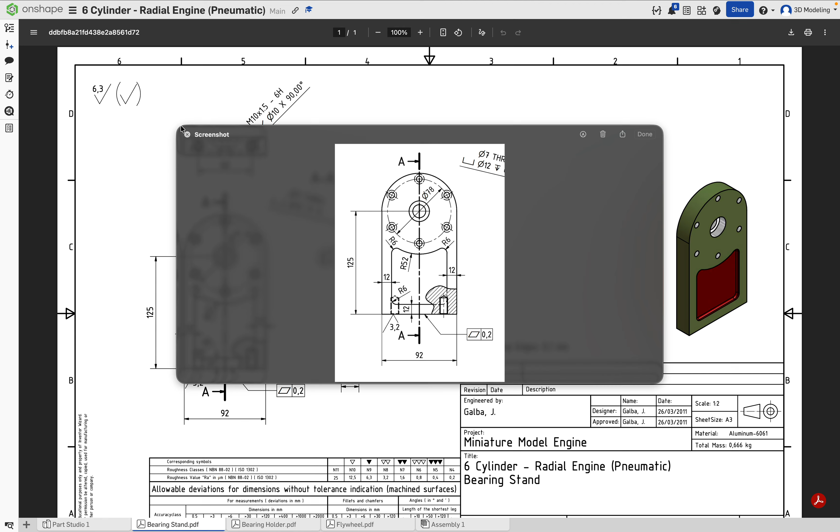Here we go. Now we're moving to our part studio and we will move this back here so it doesn't interfere with us. Now we will draw it in a front plane, so click sketch, front, and let's start tracing it out. So we can see that we will have a big circle. Somewhere from here to here.

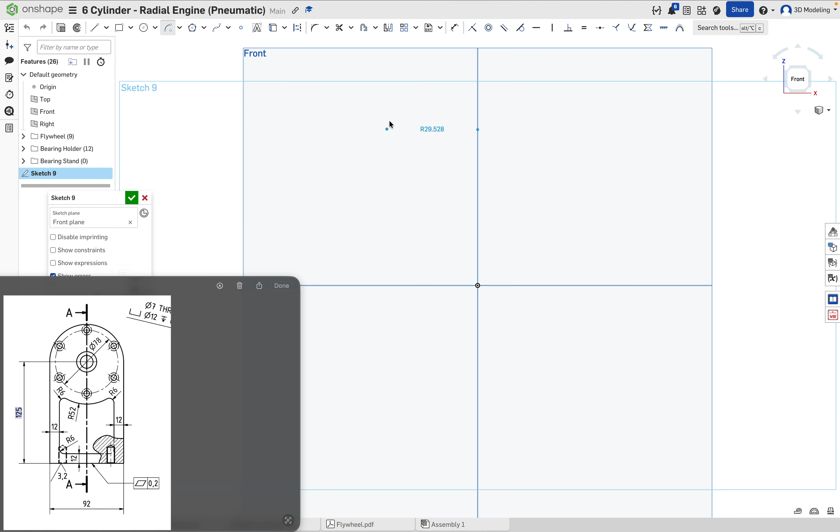And the circle will have a connection between the baseline and the part that will directly connect to it. Now these parts are vertical and this line down here is symmetric around the y-axis. Good. These two parts are tangent, so let's use the tangent tool to make sure that it's true. Good.

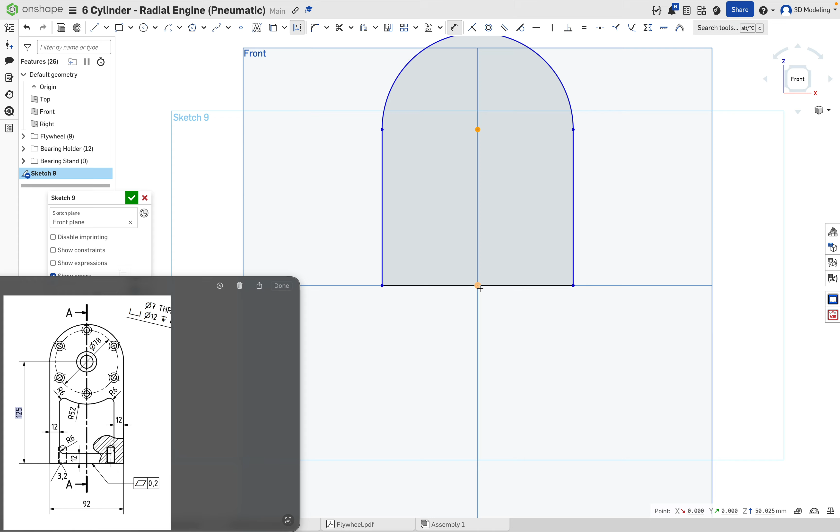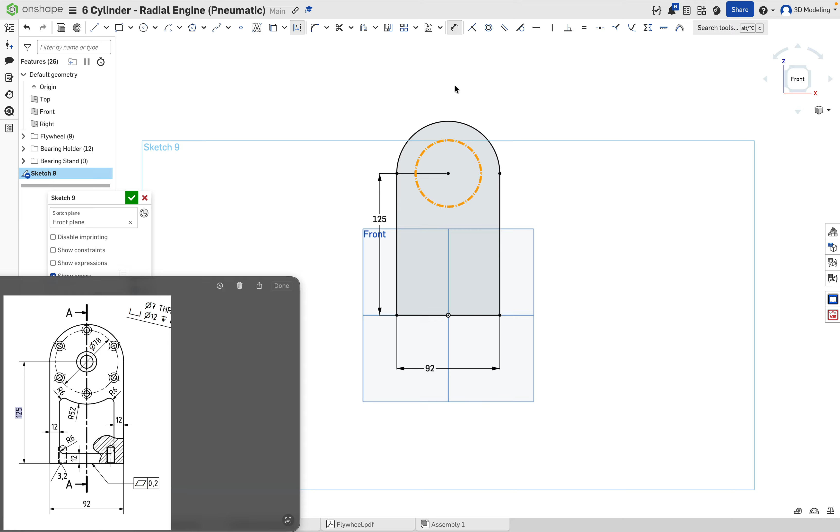And we have the distance of 125 millimeters. So let's go ahead and make sure that the distance from the center of the circle to the origin is 125. Now, let's continue. We know that base is 92. And we know that this circle, right, we also have the inner one. So let's pick the circle tool as a construction and make sure that this one is 78 millimeters.

On the edges of this circle, we have tiny holes that we will deal with later. Before that, let's draw this inner part. And to do that, we will use this tool as well for drawing this part with the radius of 52. As well as this part. Now let's make sure that this line is moved back here and these points are the same, as well as these 2 points are also the same.

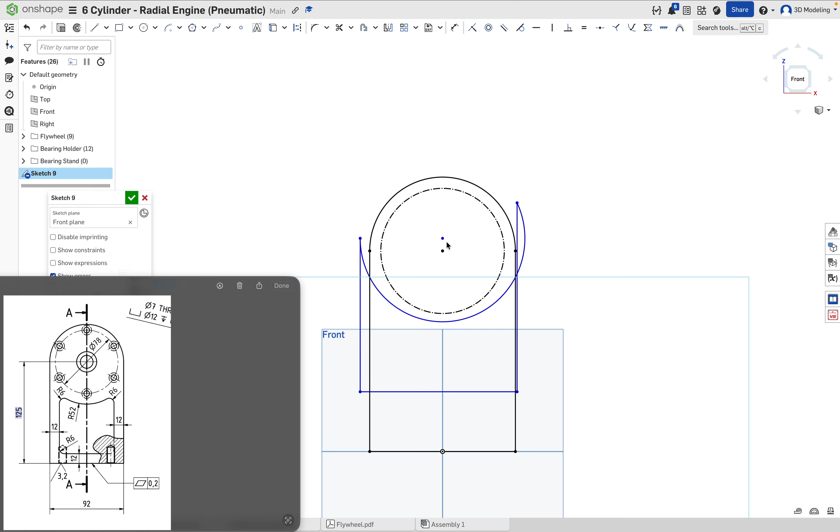Yeah, the sketch is becoming a bit broken, therefore we will delete it for now. And make sure that those dimensions are right. So first of all, the distance between those two lines is 12. And the distance between those two lines is also 12. As well as between those two lines. Good.

Now we can bring those two lines down here. And we can make a circle part that will be 52 in radius. And this will set the dimensions for everything else. Great. Now we will use this tool to round up those angles by setting it up to 6, as we can see right here on the sketch, and we will do it for all of them.

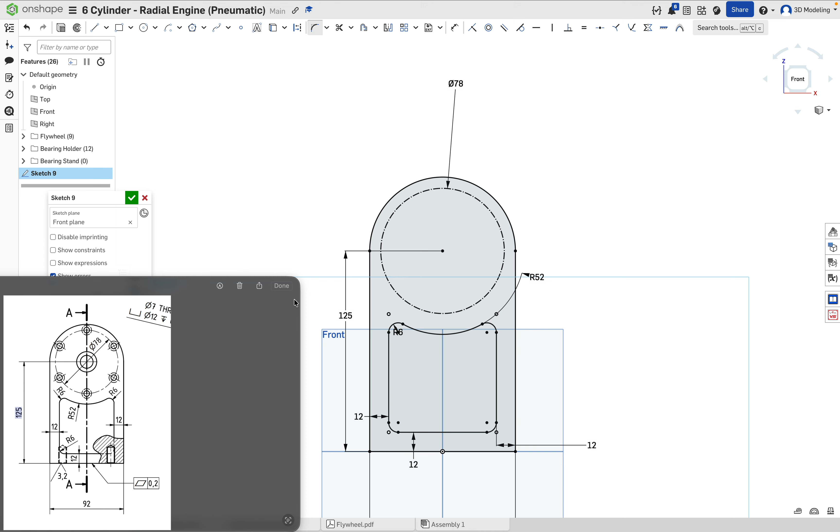Awesome. Now let's move back to those circles. We had done this main part, so we can click OK, and we can go here and look at those circles' dimensions. And we can see that we have one here with 16 and another here with inner 7. So 16 and inner 7. Let's go back here and draw one that is 16. And the other one is inner 7.

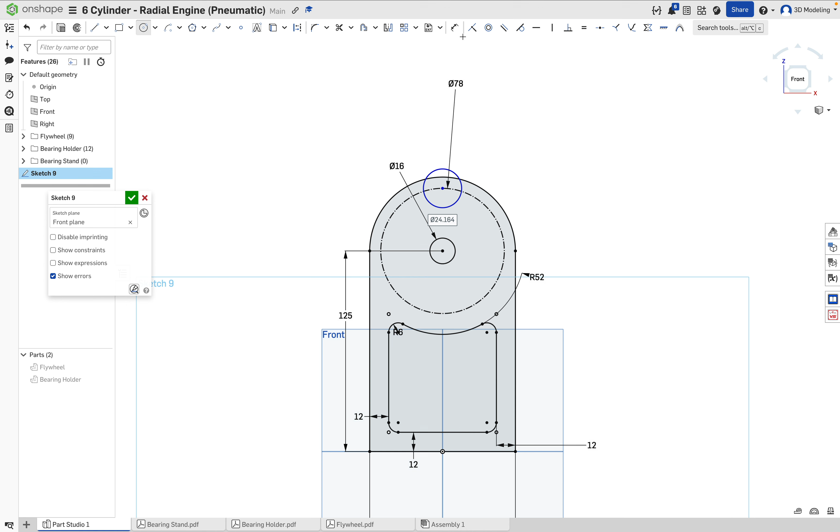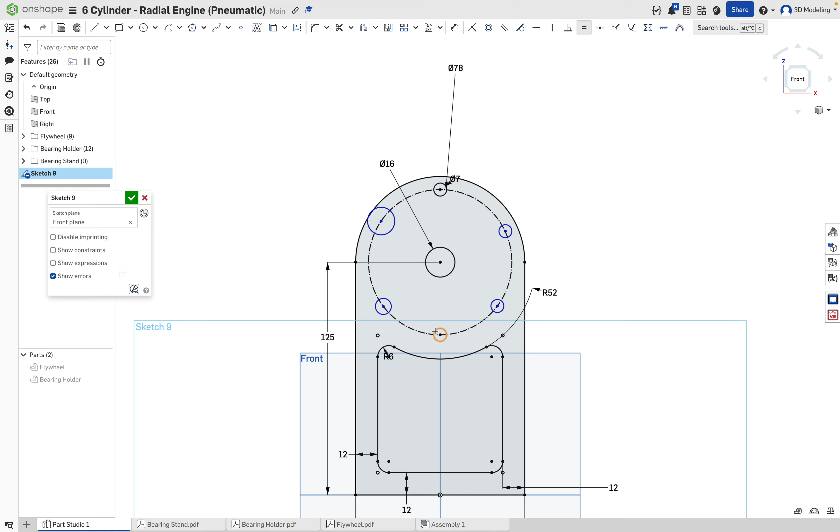Great. Now let's make sure that this point is on this line, which it is, and this point is centered. Now we need to replicate those circles that equal 7. So we'll have another one here, here, here, here, and here, as we previously saw on the image. Now we will make them equal to one another. Awesome. And right now we will use the support lines, because the angles between them should be 45 degrees.

Just let's double check with a sketch. And they are actually not. Go back here. Because this one must be a 90. But it's also weird because they seem equal distance. So what we have here is that those angles must be equal. Therefore, when we look here, they're a bit offset. And because we have here 180, and we divide 180 by 3 segments, it's 60. So the angles between those should be 60 degrees.

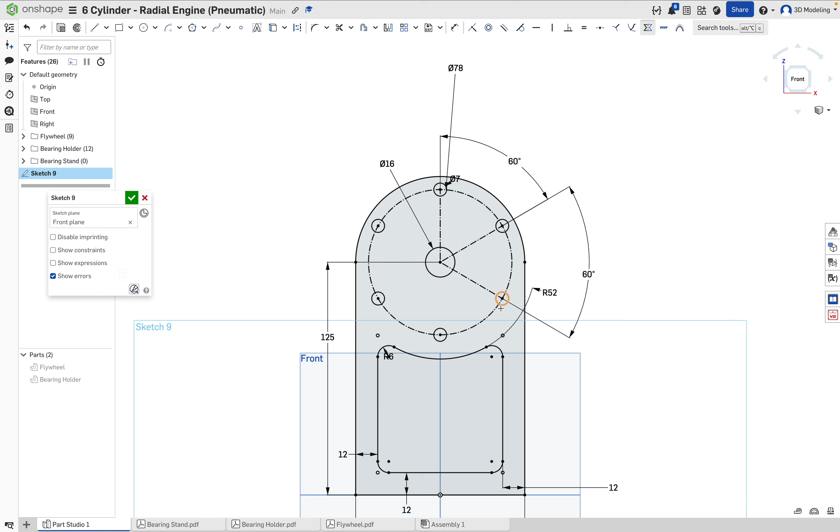And now we will use the symmetric tool to make sure that both sides are mirrored. Great. Now we can click OK, and we can extrude it by 20 millimeters. And how do I know it's 20? It's because when I go back here, I know that thickness is 20. Now we need to do the second hole here. We need to do one that is 25 on the one side and a 6 and a 12 on the other.

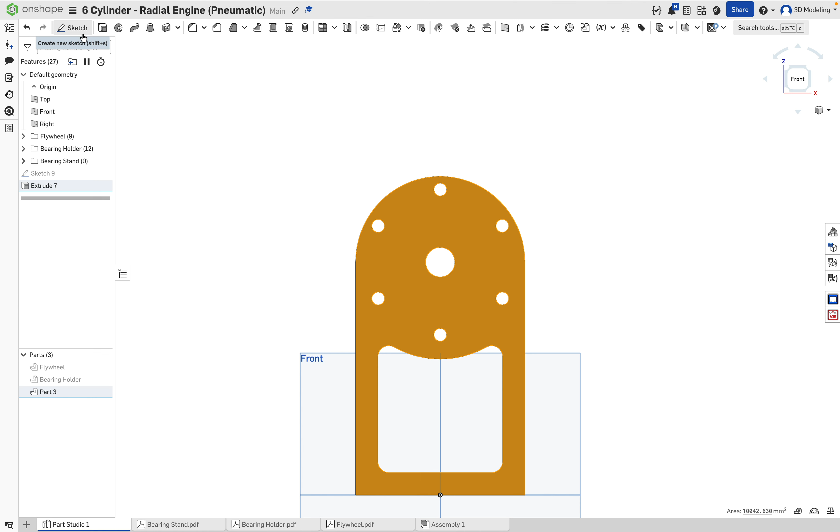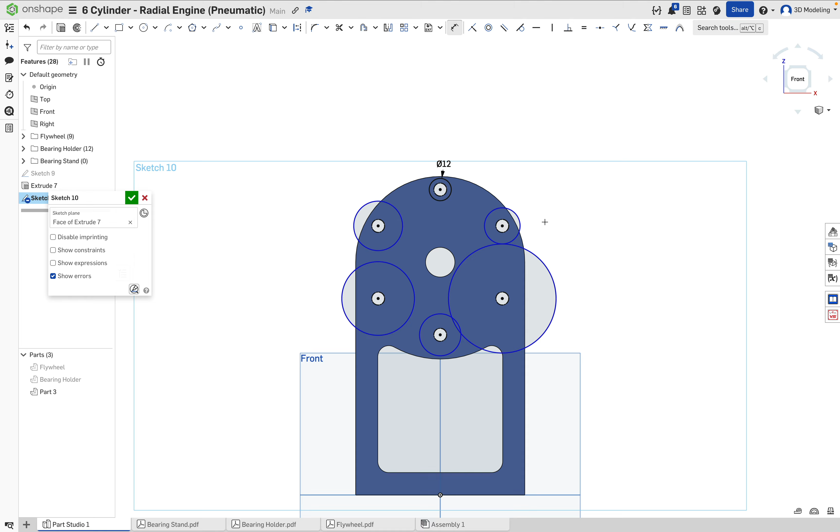So let's go back and let's start with the 12. It will be this side. We'll create a sketch and we will bring outside geometry as the support lines, and inside of them we will make circles that no longer will be support line circles. So let's repeat them. Make sure that this one is 12 and all of them are equal to the single one. We click OK. We go ahead and we extrude and we remove it.

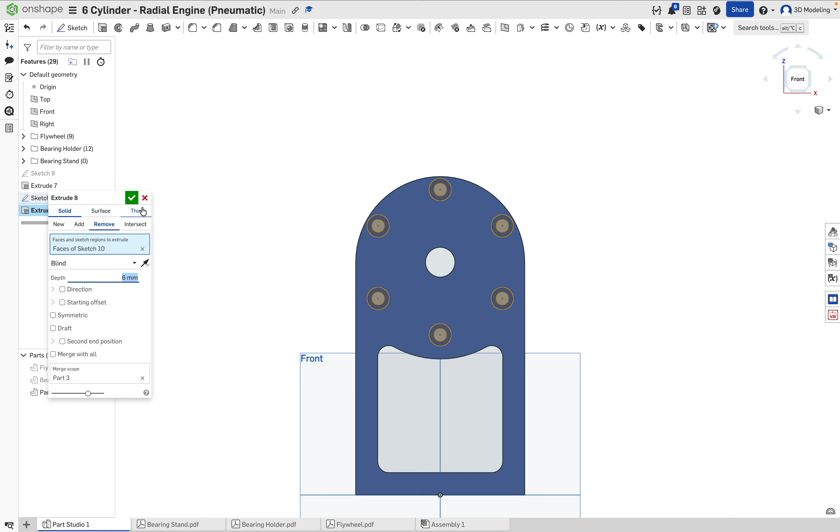But to know how much we should remove, we should look here to try to determine by how much we are removing it. And we can see that this goes in by 6 millimeters. So let's go back and change this one to 6 millimeters. Awesome. Now on the other side, we should also create a sketch. We will bring outside geometry with the circle.

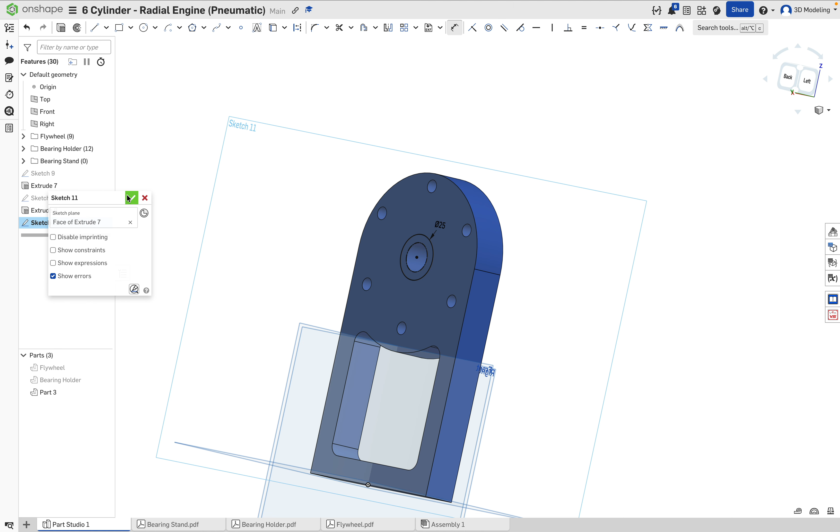We will draw a new circle. We will undo this construction line geometry that's carried over. Go here, we double check that it's 25 and we will remove it by 10. So 25, remove by 10. Go back, set it to 25, click OK and remove it by 10. Remove.

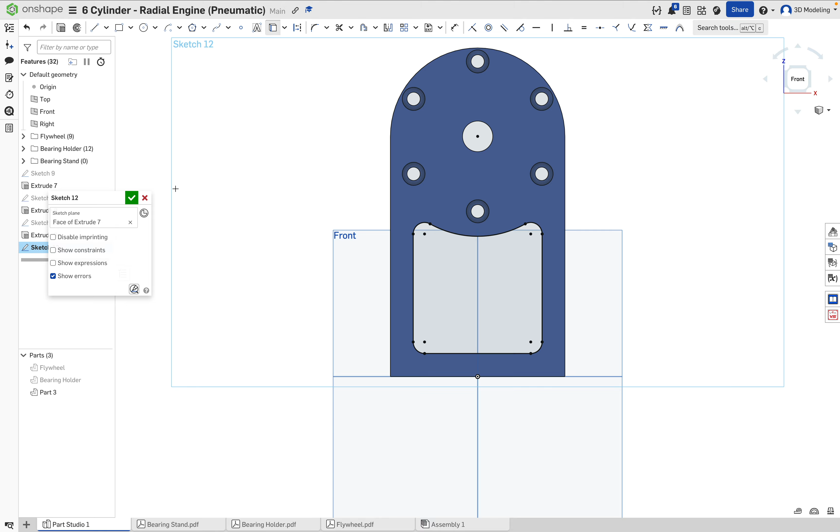Great. Now, you might have noticed that we have this part here that is not exactly how it looked on the sketch. So let's create a sketch and use this outside geometry to bring it in. However, that's probably not what we should have done. First of all, this part should have been extruded symmetric. Now everything has carried over successfully. And this part, instead of this plane, should have had a front plane.

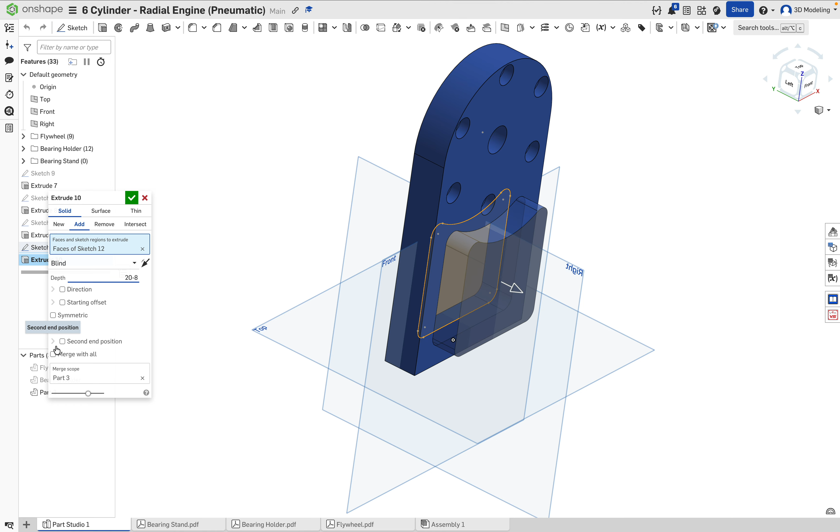So now when we go ahead and we extrude it, we would subtract 8 from 20 because each side will have a 4 millimeter dent, and it must be symmetric. So click. Great. Now when we go back we see that it checks out, and our rounding that we will do will be 2 millimeters.

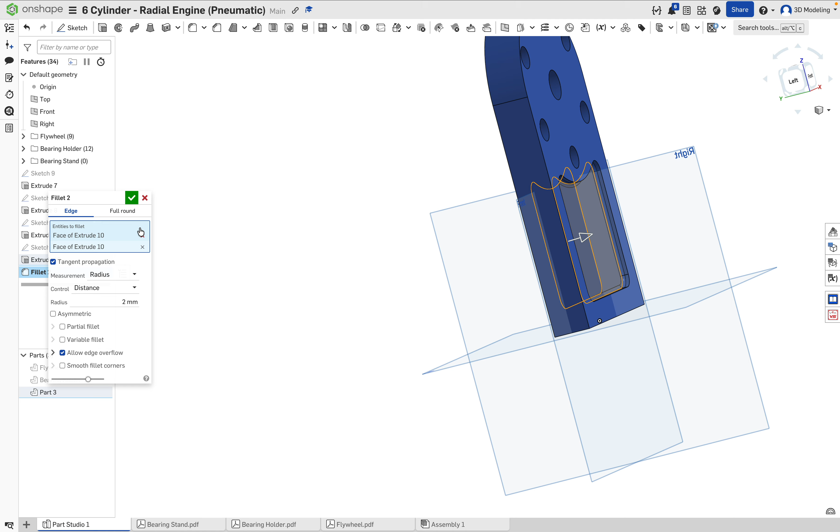Go back, select this plane, this fillet, and it's already 2 millimeters. Pick from both sides, click OK, and here we go. Let's do a final double check, and it looks exactly like our part.